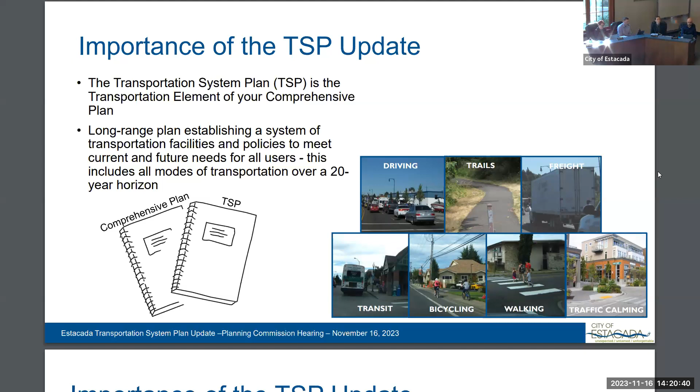Go to the next slide. So obviously the importance of having your TSP and keeping it updated: one is your regional partners like the county and the state also need to update their long-range plans and know where their investments need to be made in their transportation systems. This is an opportunity to coordinate with those partners, who did have representatives on our stakeholder group throughout this project, so it's a good opportunity to do that.

Also, there's been a lot of growth in the community recently, and updating your TSP is a time to recalibrate and hopefully get your plans for infrastructure in ahead of a lot of that growth, so you get the facilities you need to support future development.

Having plans in your TSP is also very important to be competitive for any kind of grant funding you may be pursuing. A lot of times it's almost a pass-fail criteria, because the folks with the money, before they give somebody a grant, like to see that demonstration that there's already been community support and consideration for the project. So having an adopted TSP goes a long way. Go ahead and go to the next slide.

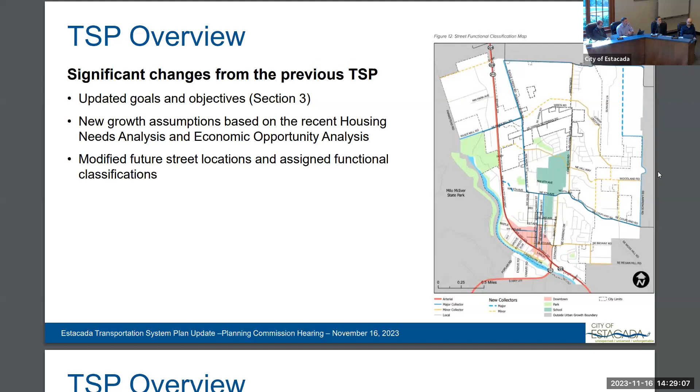The typical street design, how you might build your collector streets and your local streets, was refined a little bit. It wasn't huge changes from the existing TSP, other than a lot of clarification, because there were a lot of options in the existing TSP. So we're trying to make it easier to determine what dimensions you should be using, but also provide some flexibility in doing that. So there was a little bit of cleanup there.

The collectors themselves, we modified those cross sections to provide better bicycle facilities on all the collector streets. Then through the active transportation plan, there were a number of street segments where special designs were already adopted through that 2018 update, but we pulled those into the main document itself, so now everything's in one place.

Mobility standards were also updated. When somebody's doing a traffic impact study and assessing congestion levels at intersections, the current TSP had, I believe, a level of service D as the threshold they needed to meet. We've adjusted those and gave different standards, whether it's a two-way stop or a traffic signal, so it's not quite one size fits all, and it's also based on the amount of growth we're projecting, so it hopefully aligns better. It's a more reasonable fit.

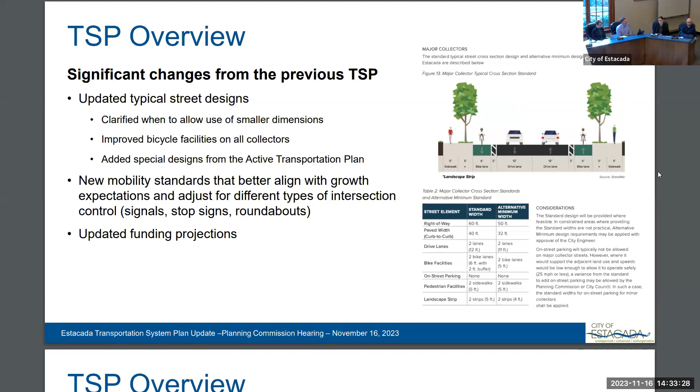And let's see, go ahead and go. I'm a slide ahead of you, I think. There we go, no, that's the one.

There was also some special consideration in this update given to things like addressing recreational access, emergency evacuations, electric vehicle charging, and a potential future bike share system. There was some policy direction given for those, to explore some of those further or encourage partnerships. In some cases, some of those ended up as projects in the project list.

And then lastly, as part of the goals and objectives of this project, there was a goal related to equity. So as we went through this process, we used what we called an equity lens, with some criteria to help us with our outreach process and trying to provide a lot of ways to reach a lot of different community members and help everyone engage.

But then also just looked at the outcomes of the TSP themselves. So I think that is the end of my

Next slide. And Brandon or Matt, are they ready to jump in whenever, or do you have to engage them? This is Matt, can you hear me? We can, I'm ready to jump in, but I get a message that says I can't start my video because the host has stopped it. So you can see my face up there, I think, but not my face moving. Anyway, I will jump in and cover these three slides, and then Brandon and or I will be available to answer questions. And I'll turn my video on at some point if I can.

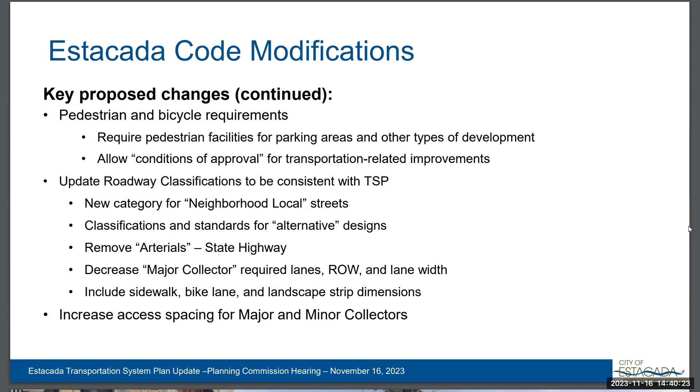It's not a huge number of changes to your code, but a number of important changes to meet those overall objectives that I talked about a moment ago. I think that's my last one. Go ahead and go to the next one and see.

I still can't show my face, but that's okay.

Do we want to pause here and just, Matt, did you want to take code specific questions at this point? I'm happy to. Brandon and I are happy to do that. It's kind of up to you all.

If you don't have a time constraint, we were going to ask everyone to hold their questions until the end of Alan's piece here, if you don't mind. I have a little bit of a time constraint, I'll have to jump off probably around 3, but Brandon will still be here and he can answer questions as well about the code amendments. He really did the bulk of the work here. So I would say let's go ahead and have you talk about the airport provisions, and then if I'm still here and I can help answer code questions, that's great. And if not, then Brandon can definitely take care of it. So does that sound good? Okay? Yep. Yeah, that's good.

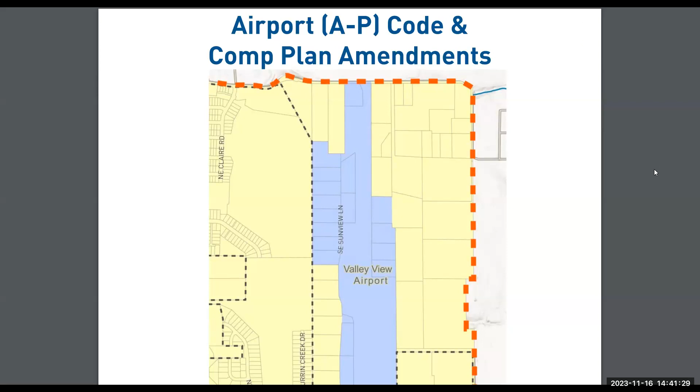Thanks, Matt. Okay, I'm going to talk a bit about the airport code and comp plan amendments. I'll give a bit of an overview, just kind of how those came to be. Go to the next slide, please.

Hey Alan, before you get into that, which piece of artwork are you working off of here? So we got one that has a blue tab on it. I believe everybody has this. That's dated the 15th. There is an updated one, yes. So the ordinance itself is exhibit 1 of the staff report, and then the ordinance has its own exhibits, so those are lettered. So exhibit 1C is the exhibit of the ordinance that has all of the code amendments in it.

And so we have made more recent changes to the airport related code amendments. Those are shown in that updated, separate exhibit with the blue tab that has the date on the top that's labeled updated 11/15/23. For the online folks, this is uploaded to the meeting page for today also. This will, if everyone agrees with what's in this updated airport code piece, this is how the airport related pieces will get updated in exhibit 1-C, which is all of the code amendments combined together. And I'll also be talking about 1-B, which is the comp plan. Yeah, so it's basically those two.

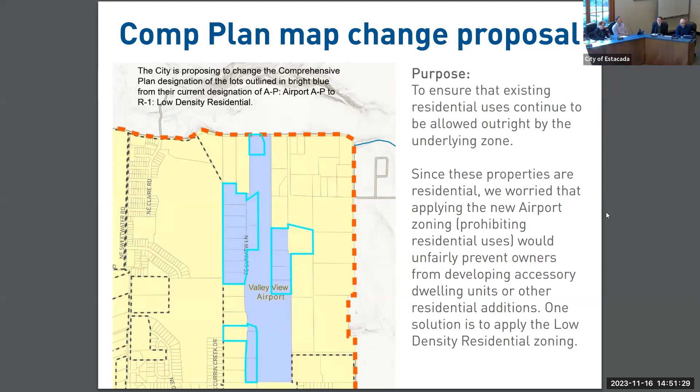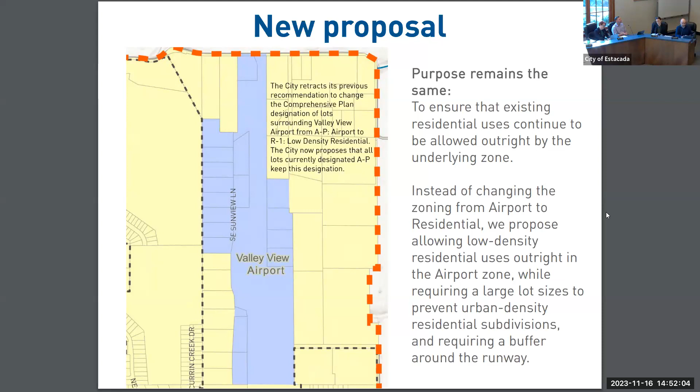Next slide. So basically we are no longer proposing to rezone any of the properties adjacent to the airport, but instead we are proposing to allow low-density residential uses outright in the airport zone. That's in order to allow property owners to develop their properties in ways that would work well with the airport. We'd also be recommending requiring large minimum lot sizes to prevent urban density residential subdivisions, requiring a buffer around the runway as well, where no residential uses would be allowed.

So just to sum up: allowing one single-family home or duplex per lot in the airport zone, requiring a minimum lot size of 2 acres to discourage subdivision of airport zone properties, and finally to prohibit any residential uses within 200 feet of the edge of the runway. That is it for the airport amendments.

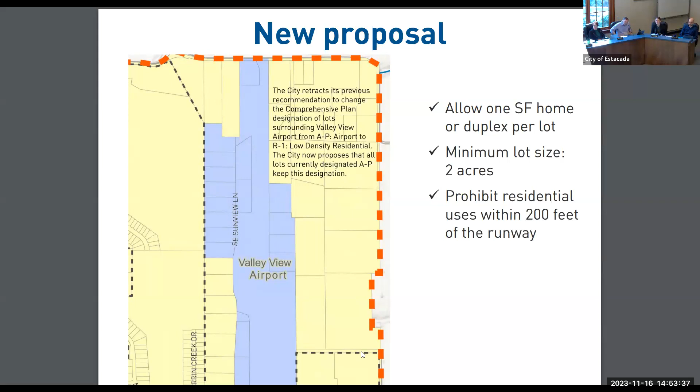Planning Commission, questions? Of course. All right, let's start at the end. You can unshare screen, that's you. Is that looking at the map? We should have the map back up, oh there. I'm sorry.

All right, first question, and it just dawned on me, this was a little bit of a surprise. I read through this whole packet you gave me, got carpal tunnel yesterday. Thank you both, Alan and Evelyn. Anyway, have we annexed the airport and the surrounding east properties?

We have not. It's within our urban growth boundary, so it will at some point become eligible for annexation, but it's not yet annexed. There are a few criteria for annexation. You have to be adjacent to existing city limits, and there's a few criteria in the cherry stem, the property line has to hit somewhere.

Was everybody that has property there aware of this zone change or whatever coming along? Yep, we followed the standard public noticing, sent everybody a postcard. Okay, except me. All right, because I just got caught off hand when I just looked up there.

And so this is all inside the safety fly zone of the airport then? There are a few different types of safety zones, surfaces and buffers, and I found out yesterday, but yes, all of those are accounted for in the safety overlay that we're proposing.

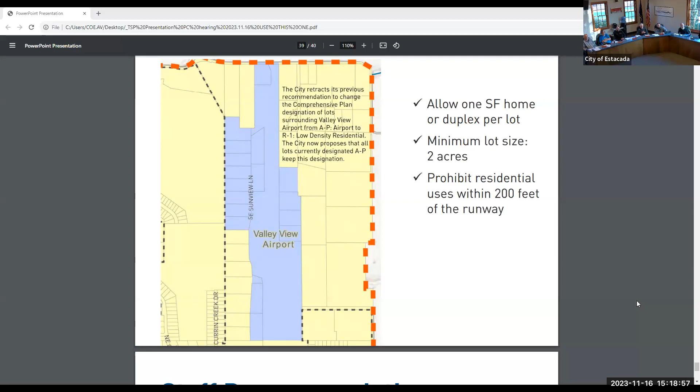And so as it goes down, you can see down in the bottom left, Currin Creek Drive and the small little lots. Those are developed houses currently abutting those big 2-acre lots just to the right of it, where the blue meets the yellow. And as it disappears out of the screen there, that city limit goes south, goes west, and then comes back up. And where the black and white line kind of ties into the red, that is the current developments going on by, I think, Cedar Ridge Homes. Not that the names matter right now.

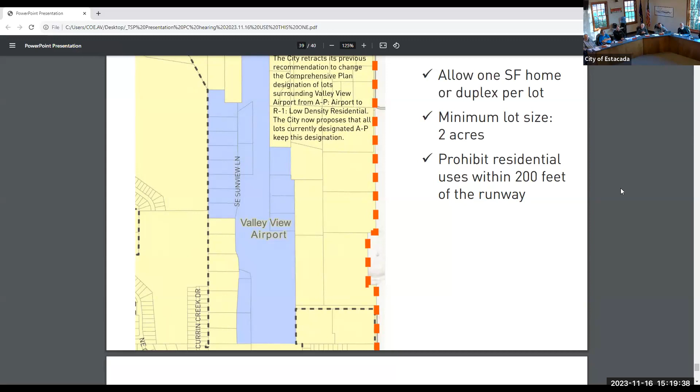So everything to the top side of the black and white lines is outside of the city limits, but inside the urban growth boundary. And so the requirement for us is to adopt this airport plan overlay to meet state requirements. Is that right? Yes. Does that help, Ralph?

So you were asking what the difference is between the purple or the yellow and blue. The yellow is R1 - all those properties are zoned low density residential. The purple or blue is the airport designation, single family, 2 acres minimum. That's the proposal, to apply the 2 acre minimum lot size in that airport zone.

I want to back up here. This is our current map. Part of the issue is that we've always had this airport zone designation on our comprehensive plan map. This map shows all the land within our urban growth boundary, whether or not it's annexed in yet, and shows what the zoning designation should be whenever those properties eventually come into city limits.

So we have this zoning designation on our comprehensive plan map for the airport property and those properties around the airport. That tells us, if any one of these property owners came to the city and asked to annex, the default would be to apply whatever zoning is shown on the comprehensive plan map. Part of the problem we're trying to solve today is that we're supposed to also have a...

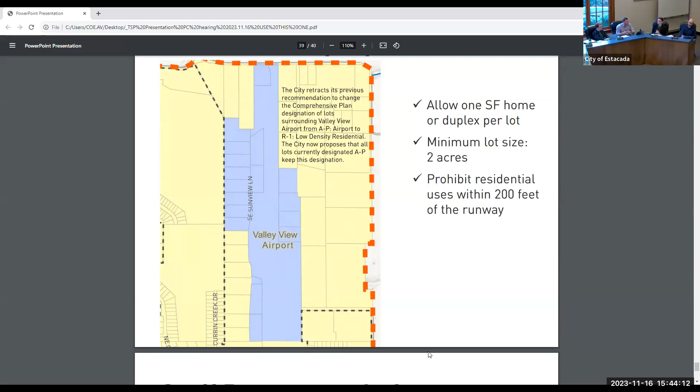So with that, lots of good, robust public hearing. We will enter back into the planning commission. And that is at 3:44. So now it is the planning commission's job to discuss, well actually to come up with a motion, a second, and then we can discuss.

It'd be nice to have all the discussion after the motion and the second. Did you want to say something? I usually make a slide with some suggested options for motions that you could say, but I didn't this time, so I was just gonna say it out loud.

Obviously we're recommending that you approve this proposal. A motion could be to approve the proposal as presented, which would include the changes we're suggesting: no longer rezoning those properties around the airport, but instead changing the airport zone rules to allow only one single family home or duplex, the 2 acre minimum lot size. And there was another piece.

Yeah, oh, the 200-foot buffer for residential structures from the runway. That's not currently in the agenda item. Are those changes shown? Those changes are not shown in your packet, but they're shown in the extra updated airport code that you have.